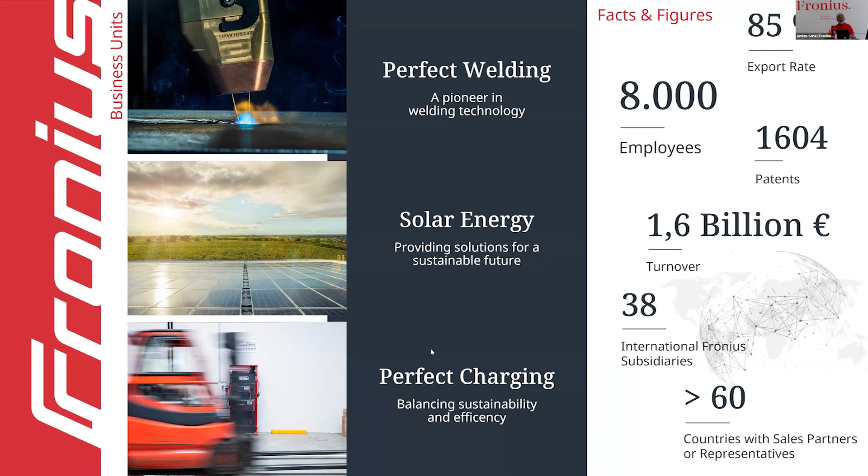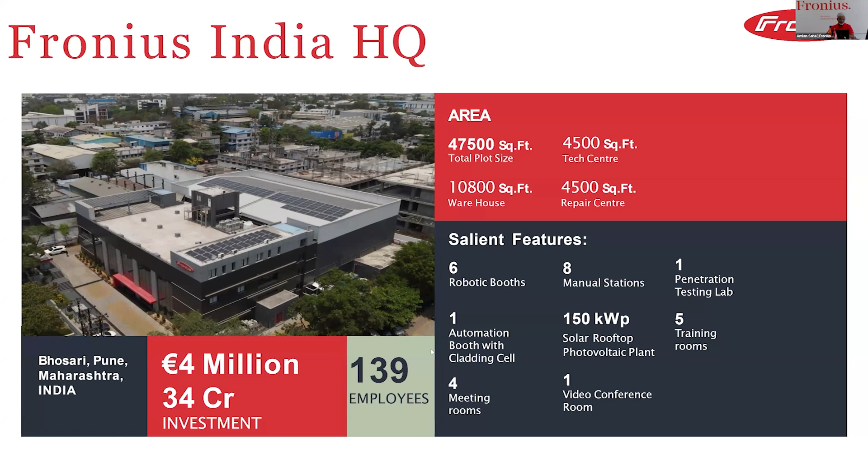Fronius India headquarters is located in Pune, and we have a dedicated solution and skill development center for our industrial customers and academia, that is academic institutions, engineering colleges, universities. We work closely with them. We also have various regional centers in Gurugram, Ahmedabad, Mumbai, Bangalore, Chennai, Hyderabad, with capabilities to demonstrate robotic welding as well as automation welding.

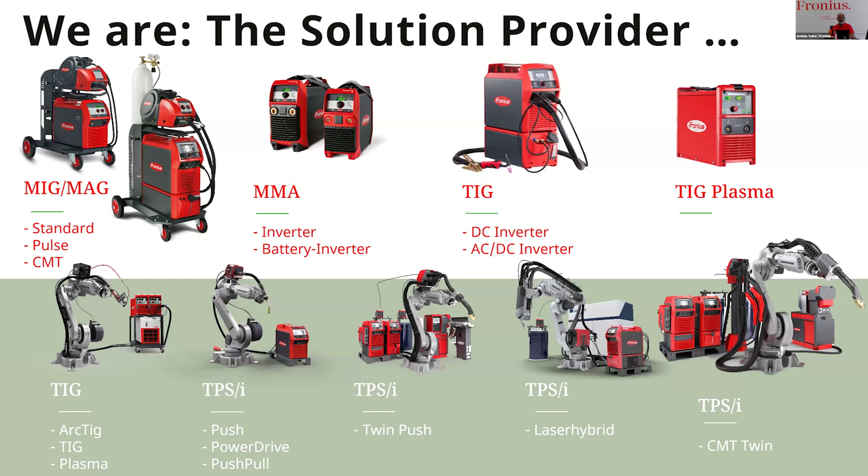Under our Perfect Welding business unit of Fronius, we offer total solutions starting with manual welding of various processes like MIG-MAG, MMA, TIG, plasma, as well as robotic welding solution systems and hard automation. Hard automation means it is manipulator-based, column and boom, where we do not use robots.

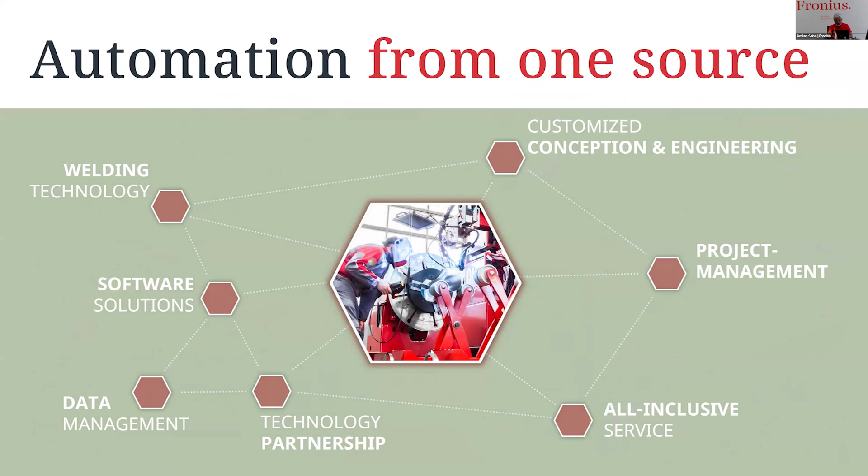So Fronius Automation offers total solution from a single source. That is, the complete responsibility for the system, its performance, and after support lies with the same company. These systems involve robotic systems as well as hard automation systems. We develop software and hardware for complete requirements, including controllers and programs.

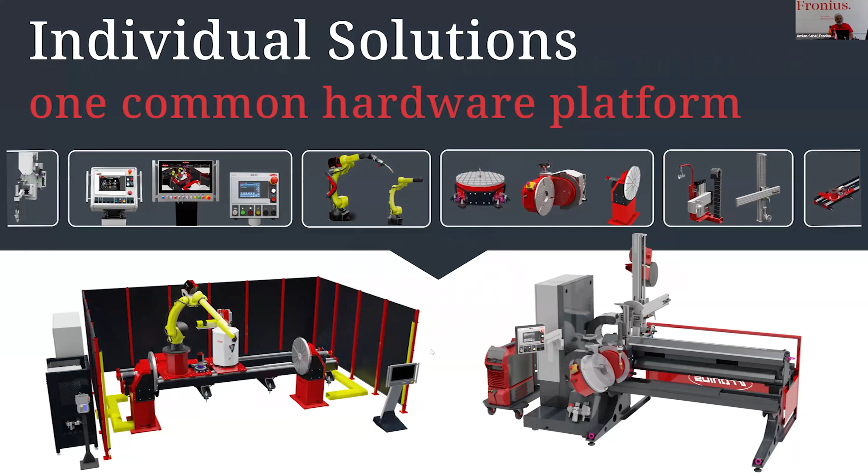Coming to today's topic, I would like to emphasize that welding is a complex and highly dynamic process involving many variables. Welding is always a challenging task, be it a manual process or an automated or robotic system. Some of the welding challenges are mentioned in my slide. Like selection of the right welding parameters.

This is very important. Maintaining the arc gap steady throughout the welding, achieving the desired depth of penetration as per joint strength requirements. Welding of special metals like high strength steels, material without distortion, thin material welding, welding of ferrous, non-ferrous, and various others. That means every welding is different. Welding at open site, that is pipeline or structural fabrication, brings in a lot of new challenges.

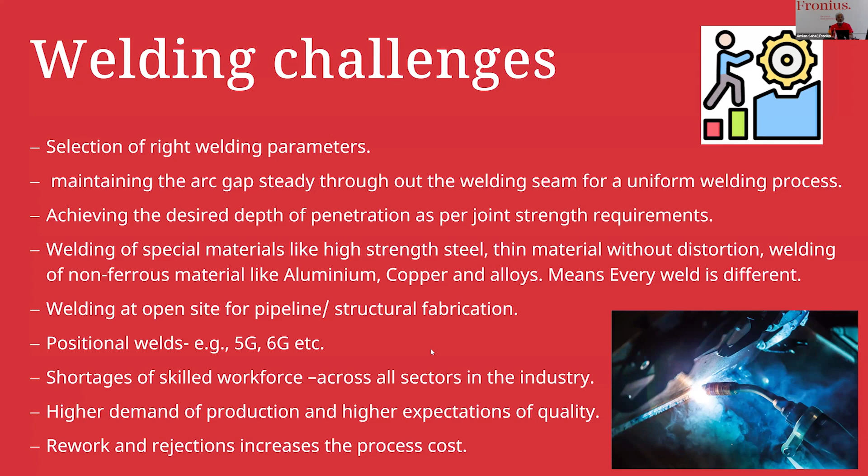Positional welds like 5G and 6G welding, shortage of skilled workforce across all sectors in the industry, higher demand of production and higher expectation of quality; rework and rejections also increase the cost. All these put together bring a range of challenges in front of us. Also, there are robotic welding challenges to bring the right solution for individual needs.

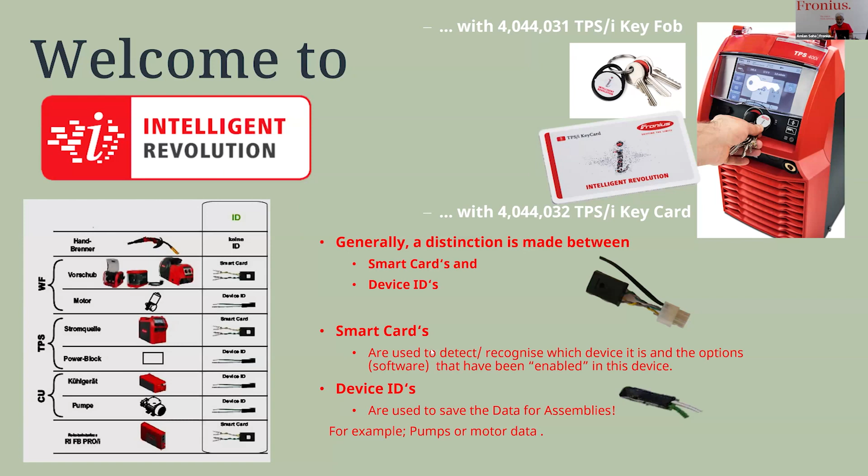Before giving the solution for robotic welding challenges, we must have an intelligent welding system. Fronius has developed the intelligent welding system, which has smart cards and device IDs. These parts generate data and enable devices to detect the various components attached. This makes it possible to work IoT enabled, ensuring traceability of every operation as well as documentation.

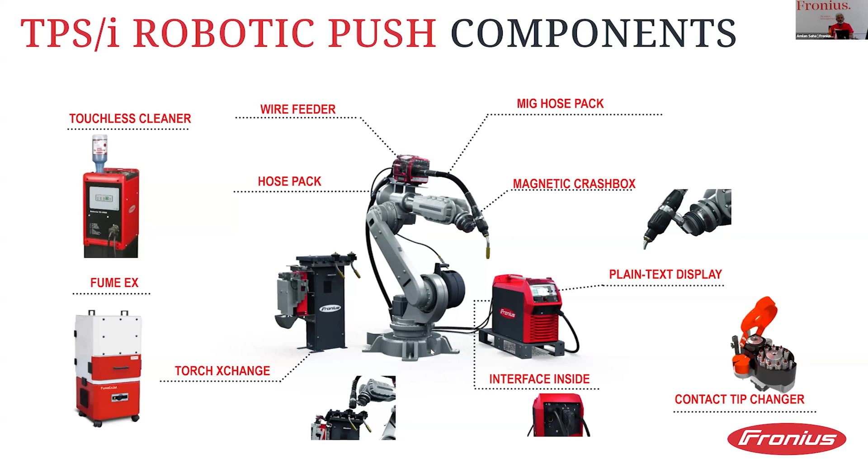This slide shows a typical robotic welding setup with the peripherals of a welding power source and accessories for a push MIG-MAG system. Push means wire feeding is unidirectional. Apart from the robot, shown in gray, which can be any make, the other important systems like the interface as well as the welding process, software and programs are all integral parts of the system.

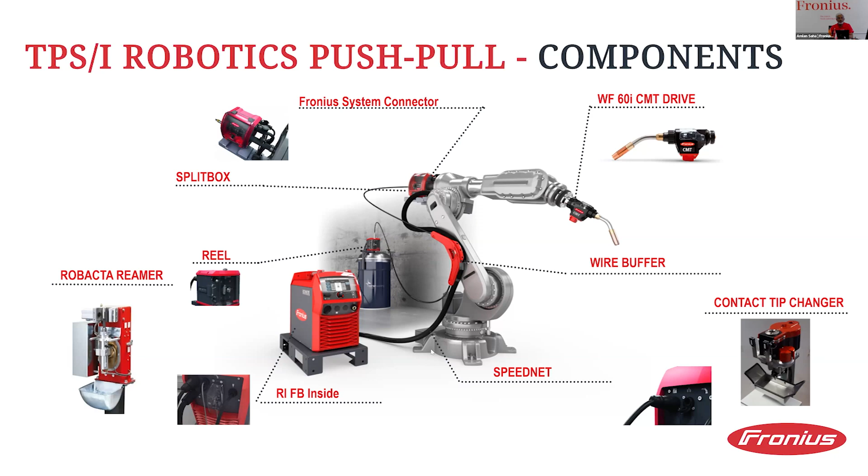Similarly, the push-pull system, which is basically cold metal transfer, where we are able to do thin material welding as well as overlay, also has setup requirements like this. But talking about welding challenges, like robot teaching: with any robot, teaching is always a time-consuming process.

During teaching, many times we are not able to maintain the stick out. The wire touches the component and gets bent. Every time we have to cut the wire and reset the stick out measurement for proper teaching.

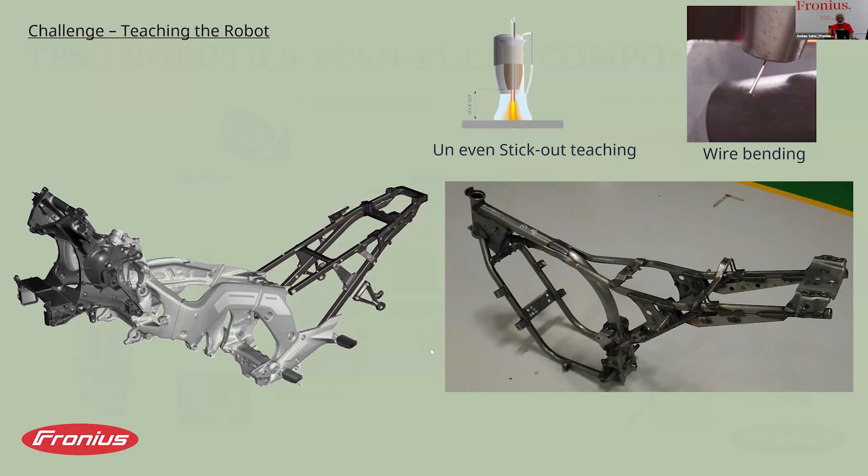So in this kind of complex components, in this video, we will share...

With the help of an intelligent system, teach mode makes it very easy. So there's no additional cost, time saving, and no rejection or rework due to wrong teaching. This is the advantage and benefit to the customers.

Part tolerance issues could be there. Robot programming path versus actual job deviations could be there. It can be a single wire, double wire, or twin wire process, and various joint configurations could be there - some T joints, some butt joints. So various options are available. So what is the solution?

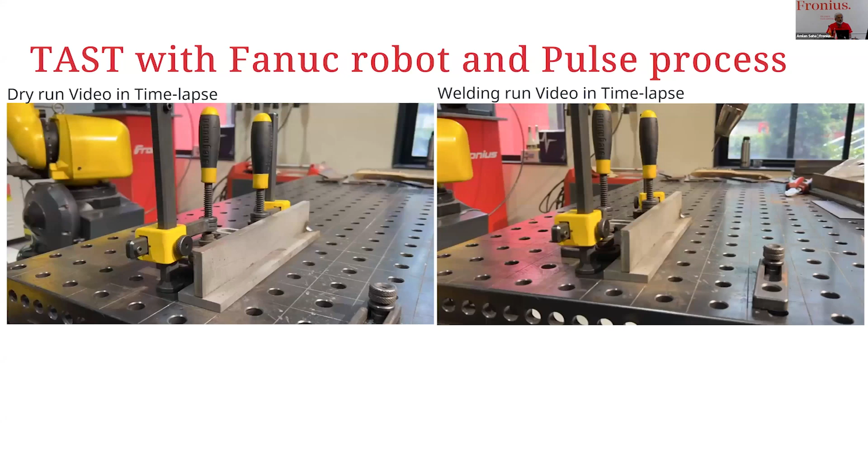We call it TAST - T-A-S-T, meaning through our seam tracking also. We have done this TAST function test at our center in Pune, with a Fanuc robot.

In the first video we can show the dry run, that is the teaching path, and in the second one here you can see the plates are not tack welded. It is just kept so that we ensure or expect there should be a distortion or deviation in the path.

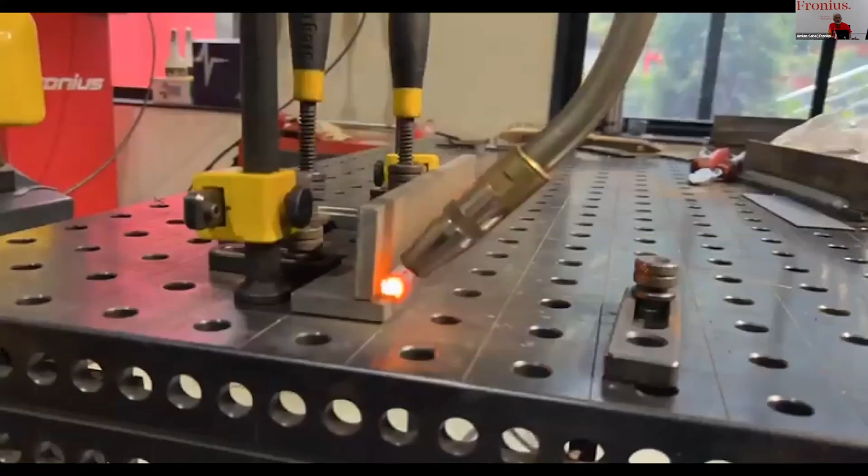During the actual welding, we can see when the welding started, the actual welding path is shifting, and the robot is getting a signal through the smart intelligent machine that there is a change in the path, and accordingly the robot arm is getting shifted, which does not allow the welding to be defected. So you can see the welded piece - even when the welding path has shifted, the welding line has not shifted; the joint is done.

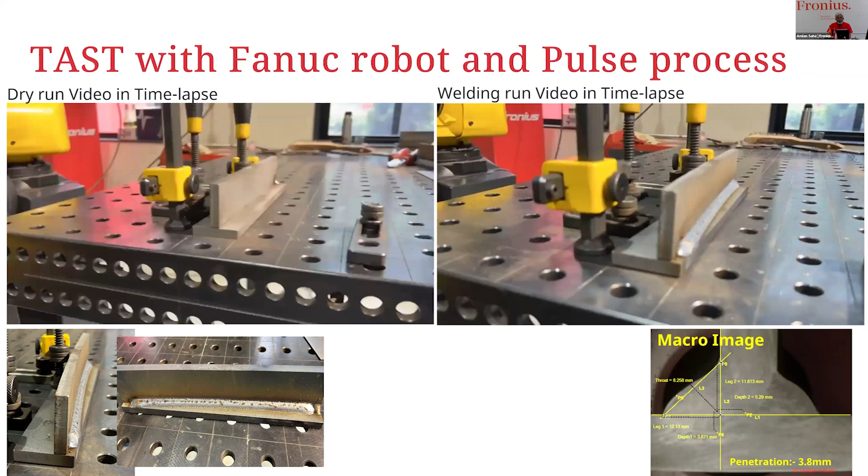This kind of feature is possible using the intelligent feature from the equipment, with no additional cost - no additional optical measuring devices like cameras are required. So the customer benefits are immense: no additional cost, time saving, and no rejection or rework.

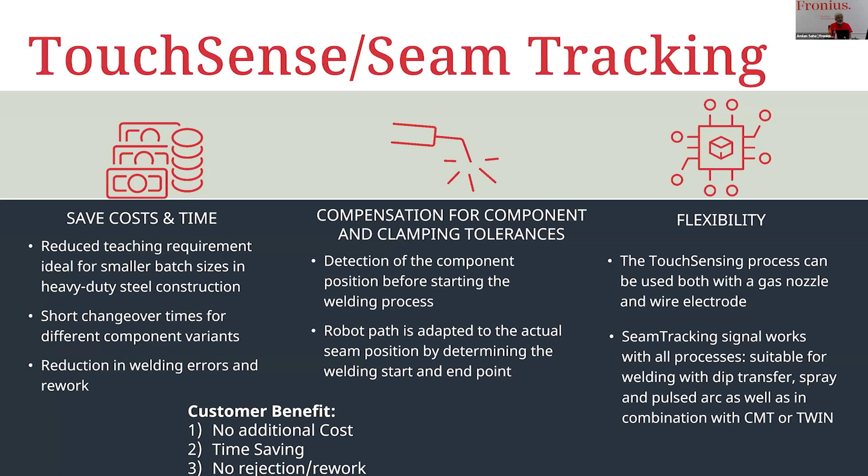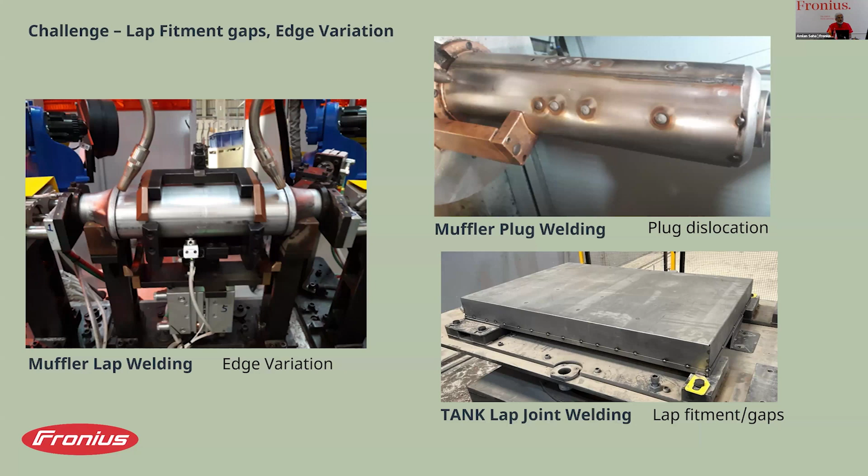The next challenge is basically for thin material with robotics, where part shifting, edge variation, and fitment gaps are the challenges. When doing thin material, these are the challenges. We have put some of the components on the screen, so we have the technology called WireSense.

With the WireSense function of the push-pull drive in the robotic system, it is possible to detect the edge position, unwanted gap, and detection of the sheet thickness between 0.5 to 20 millimeter. No additional optical measuring device is required.

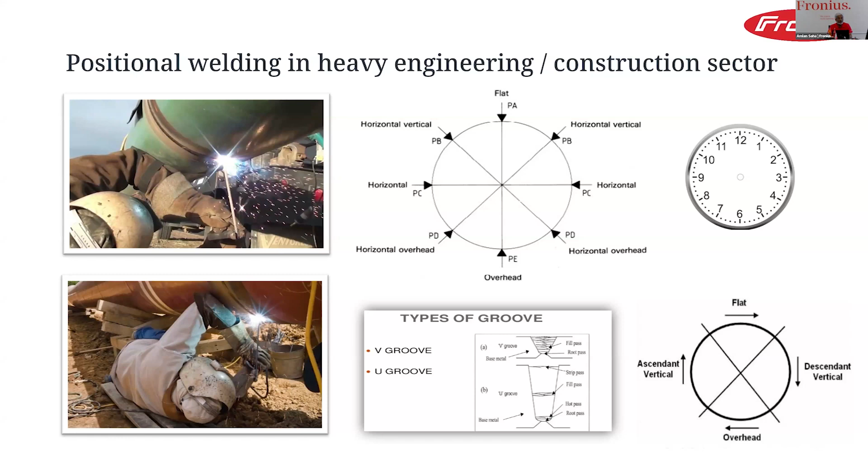Moving on to the engineering or construction sector, where the welding challenges are further difficult. Welding challenges at sites are outdoor for large parts, where positional welds are there, multi-pass welding, accessibility issues. Robotics may not be possible in all applications, so hard automation systems are also playing a big role in these kinds of sectors. When the power source is intelligent and can communicate with the hard automation system, it can create a perfect weld.

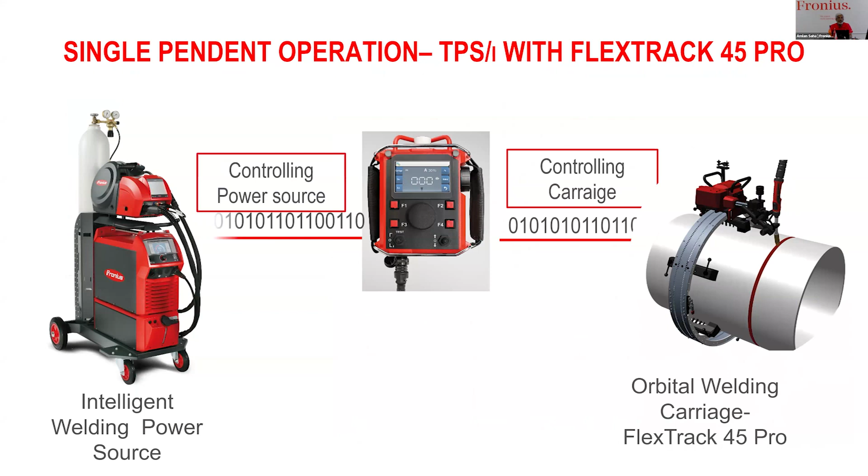We have some welding carriages here able to do welding. Here we can have two photos - there are videos, but because of time paucity I am not playing the videos. We can see the operator - I'm not calling them welders because welders are getting upgraded as operators.

They are no more holding the torch, no more welding by hand, and they are a little gap away from the welding arc and fumes. Skill issues are taken care of by the intelligent power source and sensors. Welding fatigue issues are taken care of by the welding hardware or carriage. Then results are high productivity, less defects and repairs, and ROI can be achieved in a short time.

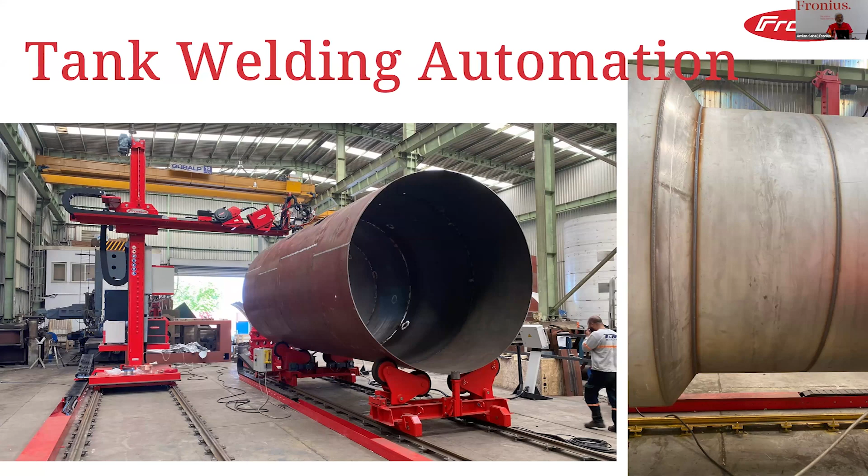Another big challenge is basically big components - welding of tanks, vessels in manufacturing industry, process equipment industry. Here we can show a typical arrangement for circular seam welding and also long seam welding; this kind of automation is also possible, and it is very much used in modern industries.

Another important application - small tubing for process equipment like heat exchangers, which with high precision requires a TIG orbital.

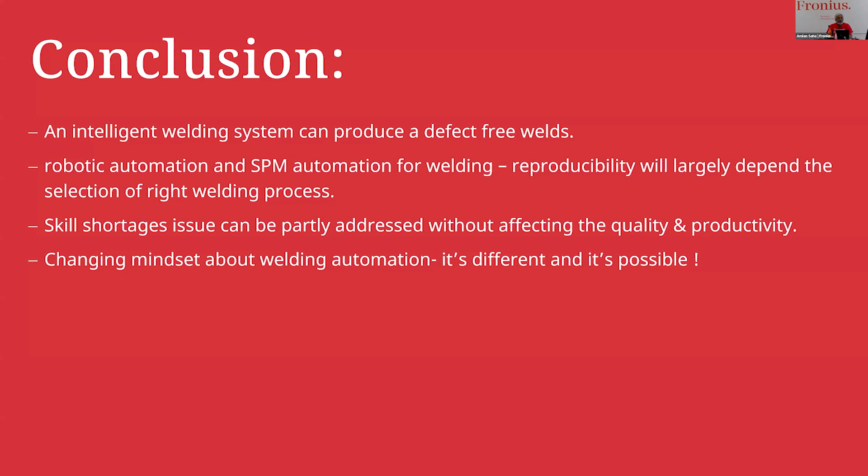So I just want to conclude my presentation with a few points: an intelligent welding system can produce defect-free welds. Robotic automation and SPM automation for welding reproducibility will largely depend on the selection of the right welding process. Skill shortage issues can be partly addressed without affecting quality and productivity. And last but not least is the changing mindset about welding automation - it's different, definitely, but it is possible.